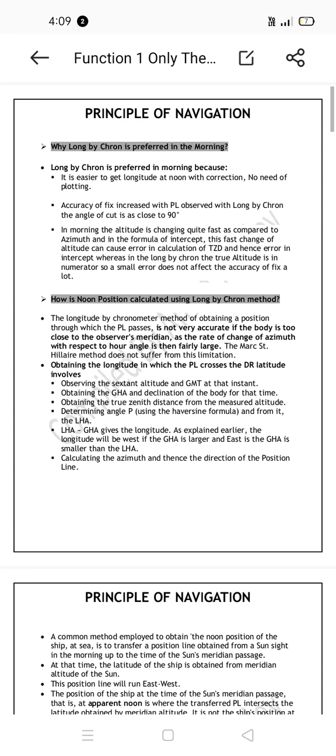In the morning the altitude is changing quite fast as compared to the azimuth, and in the formula of intercept this fast change of altitude can cause error in calculation of TZD and hence error in the intercept, whereas in long-by-chron the true altitude is in the numerator, so small error does not affect the accuracy of the fix.

Now we have to look at how we calculate it. From the formula we get the long-by-chron P, determining P, and then after determining P we get the azimuth, then from it we get the position line, and from that the DR longitude.

Now a common method to obtain the noon position of a ship at sea is to transfer the position line obtained from a sun sight in the morning up to the time of the sun's meridian passage. At that time the latitude of the ship is obtained from the meridian altitude of the sun.

This position line will run east-west, because our latitude is only our PL.

Now the position of the ship at the time of Sun's meridian passage, that is apparent noon, is where the transferred PL intersects. The latitude obtained by meridian altitude is not the ship's position at 1200 hours by the ship's clock.

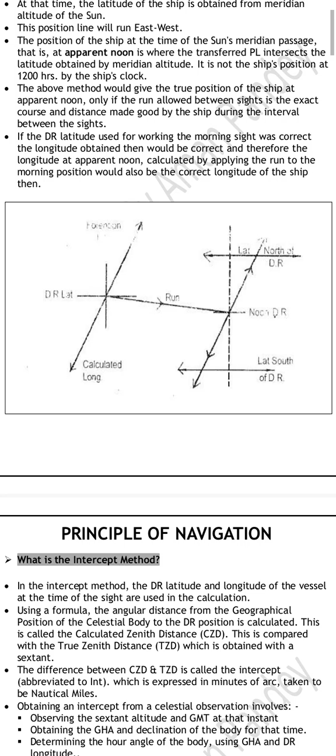The above method would give the true position of a ship at apparent noon only if the run allowed between the sights is the exact distance made good by the ship during the interval between the sights. If the DR latitude used for working the morning sight was correct, the longitude obtained then would be correct, and therefore the longitude at apparent noon calculated by applying this run to the morning position would also be the correct longitude of the ship then.

What is the intercept method? This is where we take a difference between CZD and TZD, and that becomes the intercept, and from that we get a PL.

In the intercept method, the DR latitude and longitude of the vessel at the time of sight are used in the calculation. Using the formula, the angular distance from the geographical position of the celestial body to the DR position is calculated. This is called the calculated zenith distance, and it is compared with the true zenith distance, which is obtained with the sextant. The difference between CZD and TZD is called the intercept, which is expressed in minutes of arc.

Obtaining the intercept from the celestial observation involves observing the sextant altitude and GMT at that instant, obtaining the GHA and declination of that body for that time, determining the angle of the body using GHA and DR longitude, calculating CZD using the formula, obtaining the TZD from the sextant altitude, comparing the TZD and CZD to obtain the intercept, which will be named away if TZD is greater and toward if TZD is lesser, then obtaining the azimuth and from it the direction of the PL.

Now what is the difference between long-by-chron and the intercept method? One of the key differences between the two sights is that in the PL of the former, one point on the PL is known, whereas in the case of the latter the point on the PL is not known. Long-by-chron involves a known initial position, while intercept sights involve finding the position through a process of adjustment and intersection of lines of position.

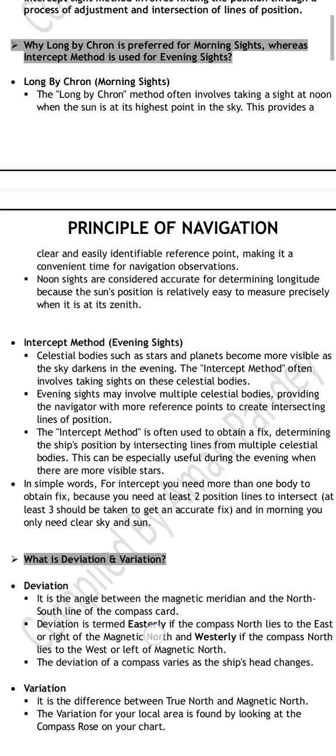Why is long-by-chron preferred for morning sight, whereas intercept method is used for evening sight? Long-by-chron morning sight often involves taking a sight at noon when the sun is at its highest point in the sky. This involves a clear and easily identifiable reference point, making it a convenient time for navigation observation.

Noon sights are considered accurate for determining longitude because the sun's position is relatively easy to measure precisely when it is at its zenith.

In the intercept method, celestial bodies such as stars and planets become more visible as the sky darkens in the evening. The intercept method often involves taking sights on these celestial bodies. Evening sight may involve multiple celestial bodies, providing the navigator with more reference points to create intersecting lines of position.

The intercept method is often used to obtain a fix, determining the ship's position by intersecting lines from multiple celestial bodies. This can be especially useful during the evening when there are more visible stars. In other words, for intercept you need more than one body to obtain a fix, because you need at least two position lines to intersect.

At least three should be taken to get an accurate fix, and in the morning you only need the sky and sun. What is deviation and variation?

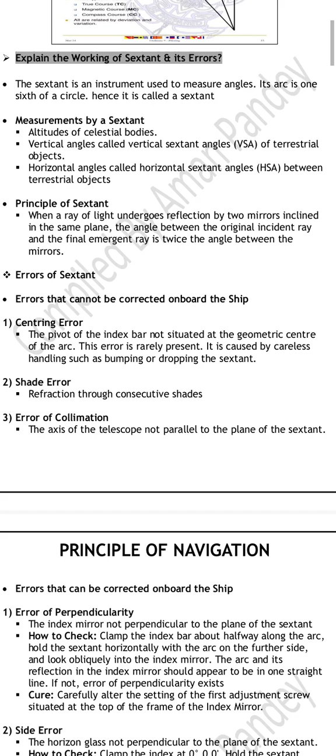Now what is the working of the sextant and its measurement for sextant altitude of the celestial body, VSA and HSA? Principle of sextant: when a ray of light undergoes reflection by two mirrors inclined in the same plane, the angle between the original incident ray and the final emergent ray is twice the angle between the mirrors.

Errors of sextant: centering error - the pivot of the index bar is not situated at the geometric center of the arc. This error is rarely present; it is caused by careless handling. Shade error is caused by refraction through consecutive shades. Error of collimation is when the axis of the telescope is not parallel to the plane of the sextant.

This is an error that can be corrected on board the ship. Error of perpendicularity: the index mirror is not perpendicular to the plane of the sextant. Now how to correct it? Just clamp the index bar about halfway along the arc.

Now hold the sextant horizontally with the arc on the further side and look obliquely into the index mirror. The arc and its reflection in the mirror should appear to be in one straight line. If not, error of perpendicularity exists. Cure: carefully alter the setting of the first adjustment screw situated at the top of the frame of the index mirror.

Now what is side error? The horizon glass not perpendicular to the plane of the sextant. Now how to check it? Just clamp it to 0 degrees, hold the sextant vertically and look at a heavenly body.

Turn the micrometer one way and then the other while looking at the body. The reflected image of the body will move above and below the direct image and should pass exactly over it. If the reflected image passes to the left or right of the direct image, side error exists. Cure: carefully alter the setting of the second adjustment screw situated at the top center of the frame of the horizon glass.

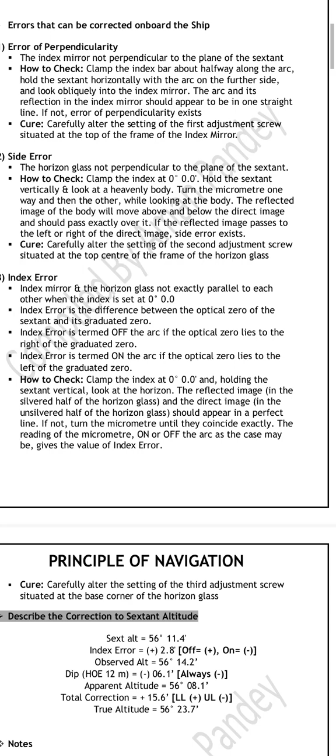Again, the horizon glass not perpendicular to the plane of the sextant. To check this, bring it to 0, hold the sextant vertically, look at the heavenly body, turn the micrometer one way and then the other while looking at the body. The reflected image of the body will move above and below the direct image and should pass exactly over it. If the reflected image passes to the left or right of the direct image, side error exists. Carefully alter the setting of the second adjustment screw situated at the top center of the frame of the horizon glass.

Now, index error: the index glass and the horizon glass are not exactly parallel to each other when the index is set to 0. Index error is the difference between the optical zero of the sextant and its graduated zero. Index error is termed off the arc if the optical zero lies to the right of the graduated zero. Index error is termed on the arc if the optical zero lies to the left of the graduated zero.

Left of the graduated zero. How to check? Clamp the index at 0 degree and hold the sextant vertical at the horizon.

The reflected image in the silvered half of the horizon glass and the direct image in the unsilvered part of the horizon glass should appear in a perfect line. If not, turn the micrometer until they coincide exactly. The reading of the micrometer, on or off the arc, as the case may be, gives an index error.

Carefully alter the setting of the third adjustment, situated at the base corner of the horizon glass.

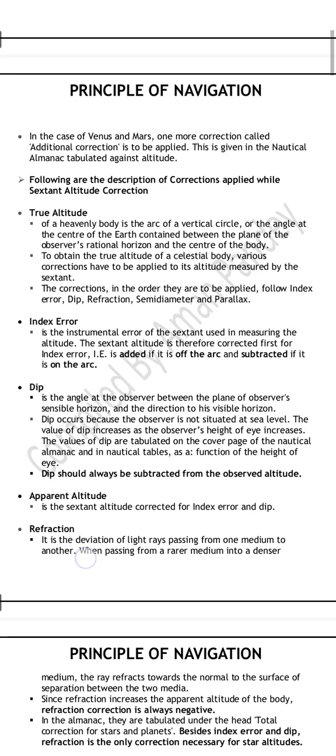True altitude of a heavenly body is the arc of the vertical circle, or the angle at the center of the earth contained between the plane of the observer's rational horizon and the center of the body.

To obtain the true altitude of the body, various corrections have to be applied to the altitude measured by the sextant. The corrections, in order, are index, dip, refraction, and parallax.

The true altitude of a heavenly body is the arc of a vertical circle, or the angle at the center of the earth contained between the plane of the observer's rational horizon and the center of the body.

Corrections have to be applied to the altitude measured by the sextant, in the order: index error, dip, refraction, and semi-diameter. Index error is the instrument error of the sextant used in measuring the altitude. The sextant altitude is therefore first corrected for index error, which is added if it is off the arc and subtracted if it is on the arc.

Dip is the angle at the observer between the plane of the observer's sensible horizon and the direction of the visible horizon. Dip occurs because the observer is not situated at sea level. The value of dip increases as the observer's height increases.

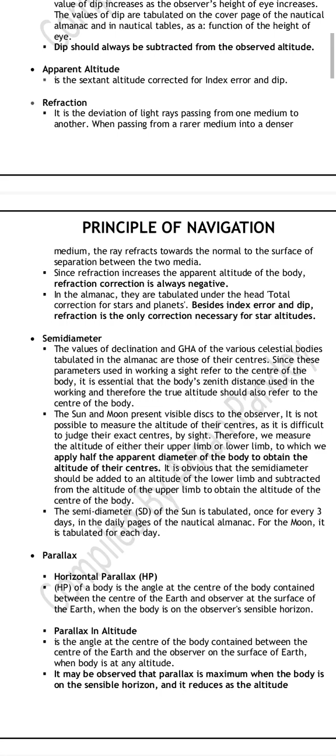Refraction is the deviation of light rays passing from one medium to another. When passing from a rarer medium into a denser one, the ray deflects towards the normal to the surface of separation between the two media. Since refraction increases the apparent altitude of the body, the refraction correction is always negative.

In the almanac, this is tabulated under the heading total correction for stars and planets. Besides index error and dip, refraction is the only correction necessary for star altitudes.

Refraction correction is always negative. When passing from a rarer medium into a denser medium, the ray deflects towards the normal to the surface of separation between the two media. Since refraction increases the apparent altitude of the body, the refraction correction is always negative, as tabulated in the almanac besides the index error.

Semi-diameter: the values of declination and GHA of various celestial bodies tabulated in the almanac refer to their center. Since these are used in working a sight, the body's zenith distance used in the working, and therefore the true altitude, should also refer to the center of the body.

The sun and moon present a visible disk to the observer. It is not possible to measure the altitude of their center, as it is difficult to judge their exact center by sight. Therefore, we measure the altitude of either their upper limb or lower limb, and apply half the apparent diameter of the body to obtain the altitude of the center.

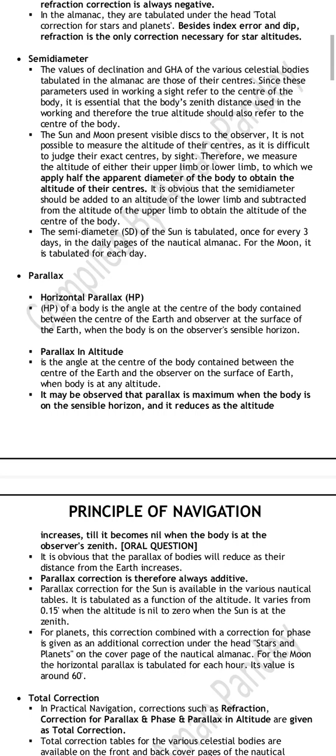It is obvious that the semi-diameter should be added to an altitude of the lower limb and subtracted for the altitude of upper limb center of the body. The semi-diameter of the sun is tabulated once for every 3 days in the daily pages of the nautical almanac. For the moon, it is tabulated for each day.

Horizontal parallax of the body is the angle at the center of the body contained between the center of the earth and the observer at the surface of the earth, when the body is on the observer's sensible horizon. Parallax in altitude is the angle at the center of the body contained between the center of the earth and the observer on the surface of the earth when the body is at any altitude.

It may be observed that parallax is maximum when the body is on the sensible horizon, and it reduces as the altitude increases till it becomes nil when the body is at the observer's zenith. The parallax of a body will reduce as the distance from earth increases. Parallax correction is therefore always additive.

Parallax correction for the sun is given in the various nautical tables, tabulated as a function of the altitude. It varies from 0.15 minute when the altitude is nil to 0 when the sun is at the zenith. For planets, the correction combined with the correction for phase is given as an additional correction under the heading stars and planets on the cover page of the nautical almanac.

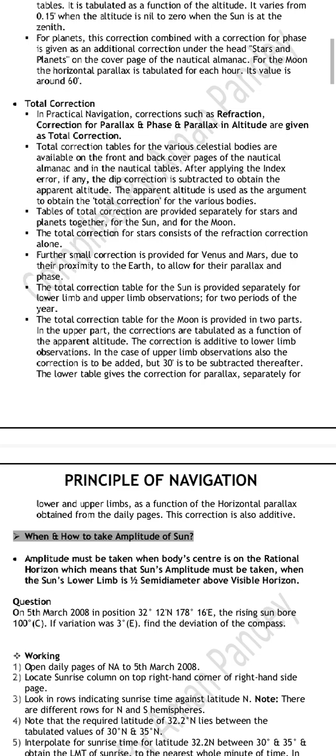A further small correction is provided for Venus and Mars due to their proximity to the Earth, to allow for their parallax and phase. The total correction table for the Sun is provided separately for lower limb and upper limb observation for 2 periods of the year. The total correction table for the Moon is provided in 2 parts.

In the upper part, the corrections are tabulated as a function of the apparent altitude. The correction is additive for lower limb observation. In the case of upper limb observation, the correction is also added, but 30 minutes is to be subtracted thereafter. The lower table gives the correction for parallax, separately for lower limb and upper limb, as a function of the horizontal parallax obtained from the daily pages. This correction is also additive.

We just took the bearing from the compass, 100 degrees. Now from the deviation card we will get the deviation as well. Now looking at this, we will be getting our GMT time.

Look at the rows indicating sunrise against latitude. There are different rows for north and south hemisphere. Note the required latitude between the tabulated values and interpolate for sunrise, to the nearest whole minute of time. In this case, this is the LMT time. Tabulate the values as shown and calculate the GMT of sunrise.

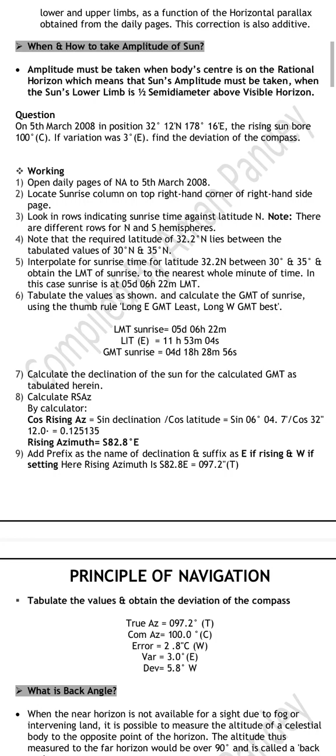We get the GMT. After getting the GMT, we'll be getting declination and latitude. We know, right? Calculating the declination for the calculated GMT and directly verify sin declination by cos latitude. We get the cos amplitude, and then azimuth we just take as southeast.

If it is morning, it is east, and if it is after 12 o'clock, setting, it is west. And using the declination sign, we use the name of the declination and we get the tabulated value from the deviation card. Now this is just an example.

True azimuth is 97.2, we are getting. Compass azimuth is 100. So if we see, error is 2.8 degrees, variation is 3 degrees and deviation is 5.8.

So we come to know, true to compass, then it is okay. So here we get is 2.8.

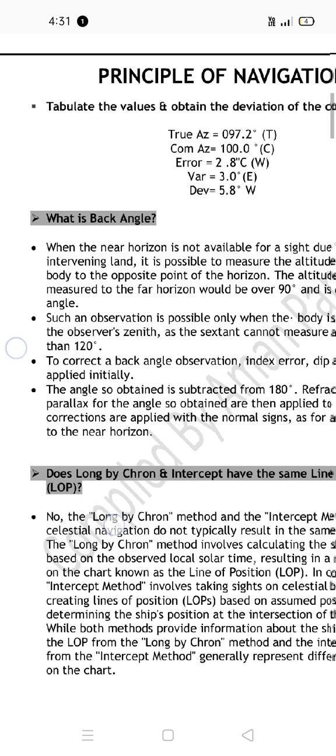Now what is back angle? When the near horizon is not available for sight due to fog or intervening land, it is impossible to measure. It is possible to measure the altitude of the celestial body to the opposite point of the horizon. The altitude thus measured to the far horizon will be over 90 degrees and it is called back angle. Such an observation is possible only when the body is fairly close to the observer's zenith, as the sextant cannot measure an angle greater than 120. To correct a back angle observation, index error, dip and SD are applied initially. The angle so applied is subtracted from 180 degrees and refraction, parallax is also obtained then applied to it. All corrections are applied with normal sign as for an observation to the near horizon.

What is back angle? If the horizon is not available for sight due to fog or intervening obstruction, it is possible to measure the altitude of a celestial body to the far horizon. The altitude thus measured to the far horizon will be over 90 and is called a back angle. Such an observation is possible only when the body is fairly close to the observer's zenith.

Now, does the Long by Chron and intercept have the same line of position? No. The Long by Chron method and intercept method in celestial navigation do not typically result in the same position line. The Long by Chron method involves calculating the ship's longitude based on observed local solar time, resulting in a meridian line on the chart known as the LOP. In contrast, the intercept method involves taking a sight on a celestial body, creating an LOP based on the assumed position and determining the ship's position at the intersection of these lines. While both methods provide information about the ship's location, the LOP from the Long by Chron method and the intersecting LOPs from the intercept method generally represent different positions on the chart.

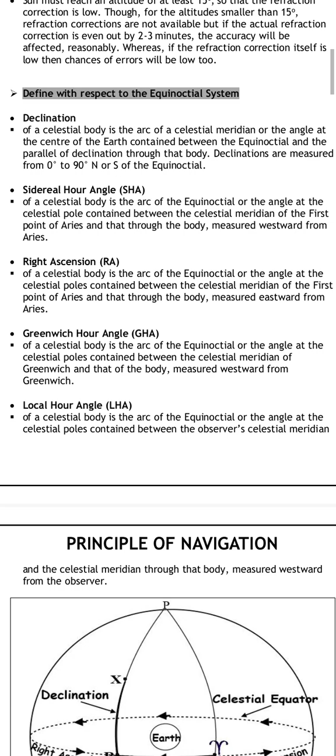Declination of a celestial body is the arc of the celestial meridian, or the angle at the center of the earth, contained between the equinoctial and the parallel of declination through the body. Declinations are measured from 0 to 90 degrees, north or south of the equinoctial.

Sidereal hour angle is the arc of the equinoctial, or the angle at the celestial pole, contained between the celestial meridian of the first point of Aries and through the body, measured westward from Aries.

Right ascension is the arc of the equinoctial, or angle at the celestial pole, contained between the celestial meridian of the first point of Aries and the body, measured eastward from Aries.

Greenwich hour angle of the body is the arc of the equinoctial, or the angle at the celestial pole, contained between the celestial meridian of Greenwich and that of the body, measured westward from Greenwich.

LHA of a body is the arc of the equinoctial, or the angle at the celestial pole, contained between the observer's celestial meridian and the celestial meridian of the body, measured westward from the observer's meridian.

The observer's rational horizon is a great circle on the celestial sphere where every point on it is 90 degrees away from its zenith.

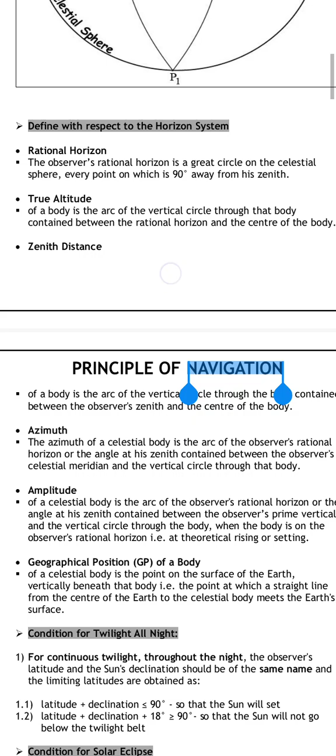True altitude of a body is the arc of the vertical circle through that body, contained between the rational horizon and the center of the body.

Zenith distance of a body is the arc of the vertical circle through the body, contained between the observer's zenith and the center of the body.

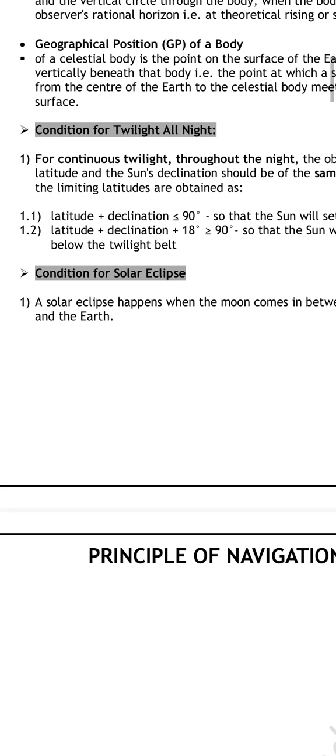This ensures the sun will not go below that twilight belt, so we require the same name for the sun's declination. For continuous twilight throughout the night, the observer's latitude and the sun's declination should be of the same name.

Observer's latitude and sun's declination should be of the same name. This is a condition for a solar eclipse, which happens when the moon comes in between the sun and the earth.

What is the pivot point? The pivot is an imaginary point of the vessel about which the vessel's turns take place. Its location changes with respect to the motion of the vessel.

The pivot point is significant because it allows the ship's operator to predict how the vessel will behave during a turn. It is used in navigational planning to determine the space needed for a vessel to execute a turn safely. Since the pivot point changes with the movement of the vessel, it can be explained with the following situation.

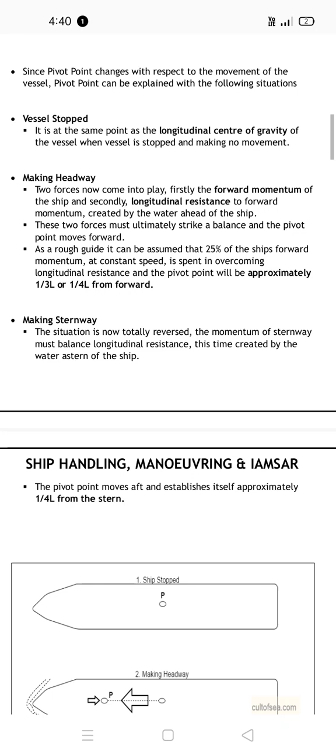When the vessel is stopped, the pivot point is at the same location as the longitudinal center of gravity. When the vessel is stopped and begins making headway, forward momentum and the longitudinal resistance created by the water ahead strike a balance, and the pivot point moves forward. As a rough guide, assuming 25% of the ship's forward momentum at a constant speed is spent overcoming longitudinal resistance, the pivot point will be approximately one-third, or one-fourth, of the length from the forward end. When making sternway, it is about one-fourth from the stern.

Now, what is the turning circle of a ship, and what is its significance? A ship's turning circle is the path followed by the ship's pivot point when making a 360-degree turn.

The knowledge of the turning circle is vital to a navigator, as this measure gives an idea of whether there is sufficient sea room in case action needs to be taken during an emergency.

What is advance? Advance is the distance traveled by the center of gravity along the original course line in the forward direction, until there is a 90-degree change from the original course.

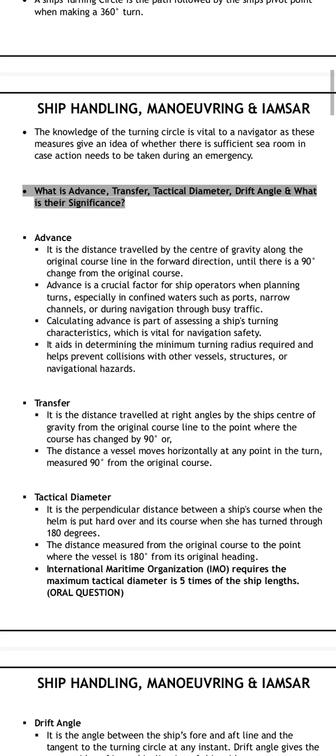Advance is a crucial factor for a ship's operator when planning turns, especially in confined waters such as ports, narrow channels, or during navigation through busy traffic. Calculating advance is part of assessing the ship's turning characteristics, which is vital for navigation safety. It aids in determining the minimum turning radius required and helps prevent collision with other vessels, structures, or navigational hazards.

Now, what is transfer? Transfer is the distance traveled at right angles by the ship's center of gravity from the original course line to the point where the course has changed by 90 degrees, or the distance a vessel moves horizontally at a point in the turn, measured 90 degrees from the original course.

What is tactical diameter? It is the perpendicular distance between a ship's course when the helm is put hard over and its course when the ship has turned through 180 degrees. The distance is measured from the original course to the point where the vessel is 180 degrees from its original heading.

IMO requires that the maximum tactical diameter is 5 times the ship's length. Tactical diameter is the perpendicular distance between the ship's course when the helm is put hard over and its course when she has turned through 180 degrees, measured from the original course to the point where the vessel is 180 degrees from its original heading.

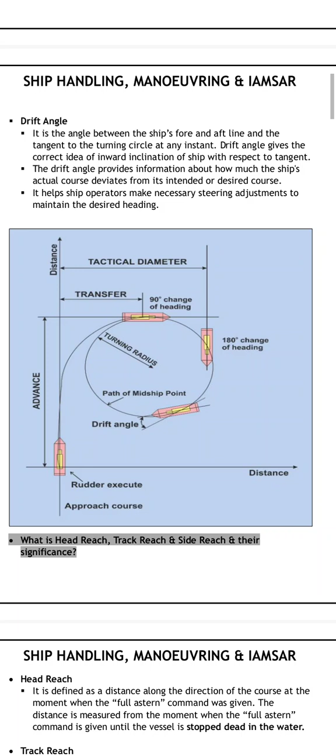Drift angle is the angle between the ship's fore and aft line and the tangent to the turning circle at any instant. Drift angle gives the correct idea of inward inclination of the ship with respect to the tangent. The drift angle provides information about how much the ship's actual course deviates from its intended or desired course.

Drift angle is the angle between the ship's fore and aft line and the tangent to the turning circle at any instant. It gives the correct idea of inward inclination of the ship with respect to the tangent, and provides information about how much the ship's actual course deviates from its intended or desired course. It helps the ship's operator make necessary steering adjustments to maintain the desired heading.

Head reach is defined as the distance along the direction of the course at the moment when the full astern command was given. The distance is measured from the moment when the full astern command is given until the vessel is stopped dead in the water.

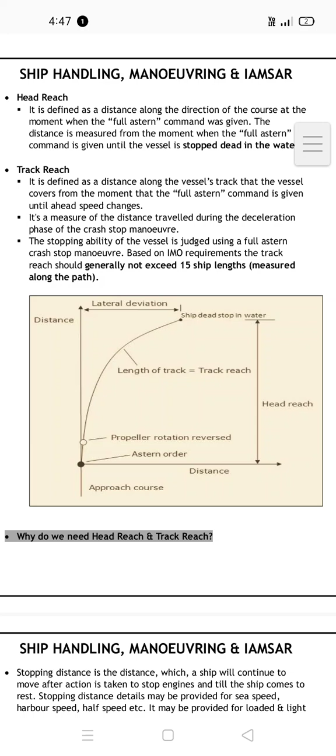Track reach is 15 times the ship's length. The stopping ability of the vessel is judged using a full astern crash stop maneuver based on IMO requirements. The track reach should generally not exceed 15 times the ship's length.

Why do we need head reach and track reach? Stopping distance is the distance which a ship will continue to move after action is taken to stop engines until the ship comes to rest. Stopping distance details may be provided for sea speed, harbor speed, half speed, etc., and may be provided for loaded and light conditions.

Stopping distance is the distance which a ship will continue to move after action is taken to stop engines until the ship comes to rest. Details may be provided for sea speed, harbor speed, half speed, etc., and for loaded and light conditions. Stopping ability is measured by the track reach and head reach realized in a stop engine full astern maneuver, performed after a steady approach at the test speed until the head speed in ship's coordinates changes sign.

Why do we need head reach and track reach? Stopping distance is the distance which a ship will continue to move after action is taken to stop engines until the ship comes to rest. Stopping distance details may be provided for sea speed, harbor speed, and half speed, and may be provided for loaded and light conditions.

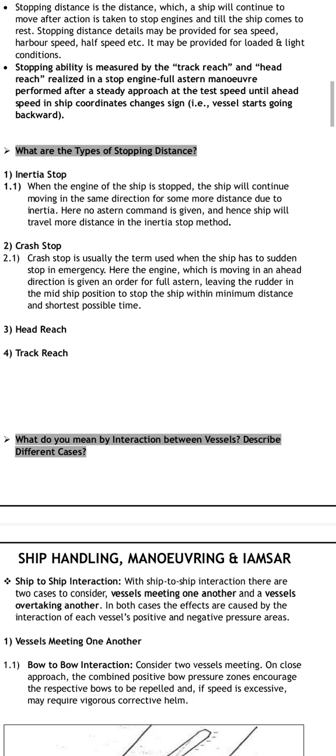Now the ship will continue to move if astern command is given, and once no astern command is given, the ship is stopped. When the engine of the ship is stopped, it will continue to move in the same direction for some more distance due to inertia. No astern command is given, hence the ship travels more distance - this is inertia stop. Head reach, track reach.

Consider two vessels on a close approach. Now, combination of positive bow pressure zones encourages them to be repelled, and excessively so.

Now two ships abeam: in this case, the combined low pressure zones encourage suction. If the vessels are very close, this can cause a violent broadside collision.

Broadside collision: the bow of each vessel now comes under the influence of the other vessel's stern, which also means the rudder of each vessel is being affected by the positive pressure of the other vessel's bow. This causes each vessel to take a sheer towards the other vessel, and if in a narrow channel or fairway, for the stern to be cast towards the boundaries of the channel or fairway.

Now stern to stern: as each vessel draws clear, the combined low pressure causes the sterns to be drawn towards each other and assists the vessels to regain their original track.

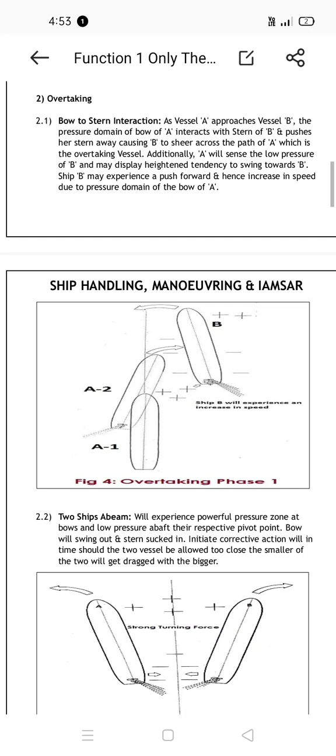Now, two ships abeam will experience a powerful pressure zone at the bow and low pressure abaft. Relative to the pivot point, the bow will swing out and the stern will be sucked in. Corrective action should be initiated in time should the two vessels be allowed to close, as the smaller of the two will get dragged with the bigger.

Now stern to bow interaction: the overtaking vessel, as it passes ahead of the overtaken vessel, may sense the effect of its bow being sucked towards vessel A - this is the bank effect.

What are the factors affecting the turning circle of the ship? Structural design and the length of the vessel - generally speaking, the longer the ship, the greater the turning circle. The smaller the clearance between the rudder and the hull, the more effective will be its turning action.

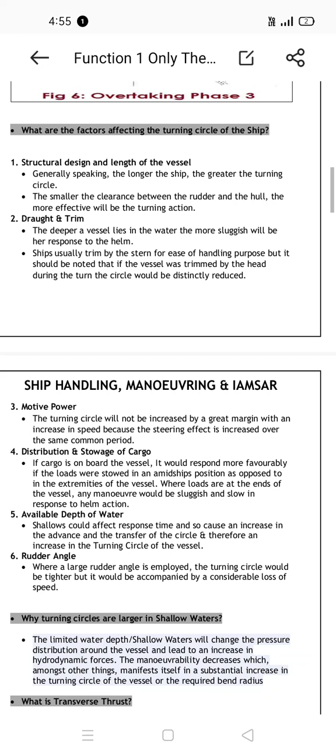Draft and trim: the deeper a vessel lies in the water, the more sluggish will be her response to the helm. Ships usually trim by stern for ease of handling purposes, but it should be noted that if the vessel was trimmed by the head during the turn, the circle would be distinctly reduced.

Now, what is motive power? The turning circle will not be increased by a great margin with an increase in speed, because the steering effect - the steering period - is increased over the same common period. Now, what is the distribution and storage?

Because of the distribution and storage of cargo on board the vessel, it will respond more favorably if the loads are in an amidship position as opposed to the extremities of the vessel. Where loads are at the ends of the vessel, any maneuver will be sluggish and slow in response to helm action.

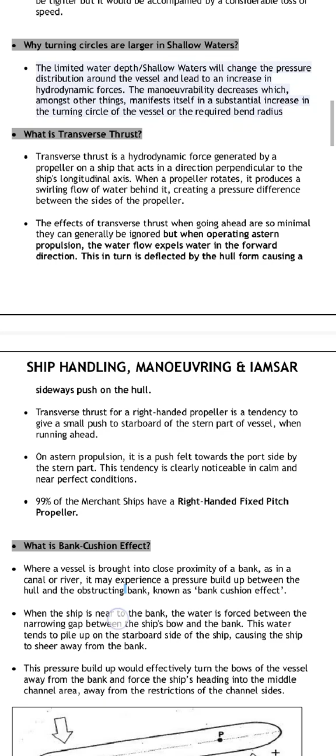What is transverse thrust? Transverse thrust is a hydrodynamic force generated by a propeller on a ship that acts in a direction perpendicular to the ship's longitudinal axis.

The limited water depth in shallow water will change the pressure distribution around the vessel and lead to an increase in hydrodynamic forces. The maneuverability decreases, which among other things manifests itself in a substantial increase in the turning circle of the vessel or the required bend radius.

Available depth and the rudder angle: where a large rudder angle is employed, the turning circle will be tighter, but it will be accompanied by considerable loss of speed.

The limited water depth in shallow water will change the pressure distribution around the vessel and lead to an increase in hydrodynamic forces. The maneuverability decreases, which among other things manifests itself in a substantial increase in the turning circle of the vessel, or the required bend radius.

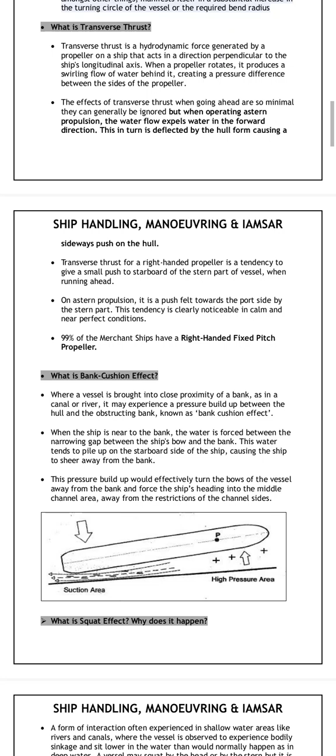When a propeller rotates, it produces a swirling flow of water behind it, creating a pressure difference between the sides of the propeller. The effects of transverse thrust when going ahead are so minimal they can generally be ignored, but when operating astern propulsion, the water flow expels water in the forward direction. This is then deflected by the hull form, causing a sideways push on the hull.

Transverse thrust for a right-handed propeller is the tendency to give a small push to starboard on the stern part of the vessel when running ahead. On astern propulsion, it is the opposite of that.

Now, what is the bank cushion effect? Where a vessel is brought into close proximity of a bank, as in a canal or river, it may experience a pressure build up between the hull and the obstructing bank, known as the bank cushion effect. When the ship is near the bank, water is forced into the narrowing gap between the ship's bow and the bank. The water tends to pile up on the starboard side of the ship, causing the ship to sheer away from the bank. This pressure buildup will effectively turn the bow of the vessel away from the bank and force the ship's heading into the middle channel area, away from the restriction of the channel sides.

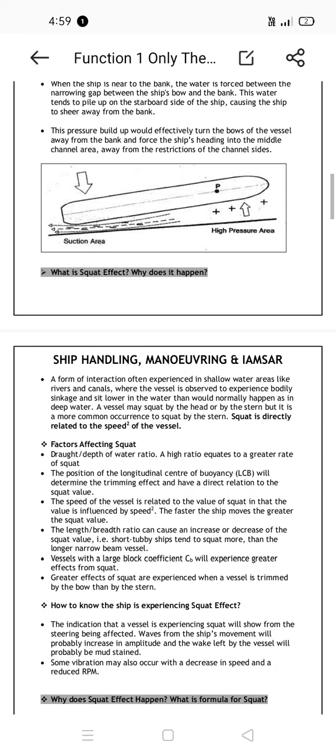A form of interaction often experienced in shallow water areas like rivers and canals is where the vessel is observed to experience a bodily sinkage and sit lower in the water than would normally happen. As in deep water, a vessel may squat by the head or by the stern, but it is more often a common occurrence to squat by the stern.

Squat is directly related to the speed squared of the vessel. Factors affecting squat include the draft to depth of water ratio; a higher ratio equates to a greater rate of squat. The position of the longitudinal center of buoyancy will determine the trimming effect and have a direct relation to the squat value. The speed of the vessel is related to the value of squat, in that the value is influenced by speed squared. The faster the ship moves, the greater the squat value.

The length to breadth ratio can cause an increase or decrease of the squat value. That is, short tubby ships tend to squat more than longer, narrow beam vessels; a vessel with a large block coefficient will experience a greater effect from squat.

A greater effect of squat is experienced when a vessel is trimmed by the bow than by the stern.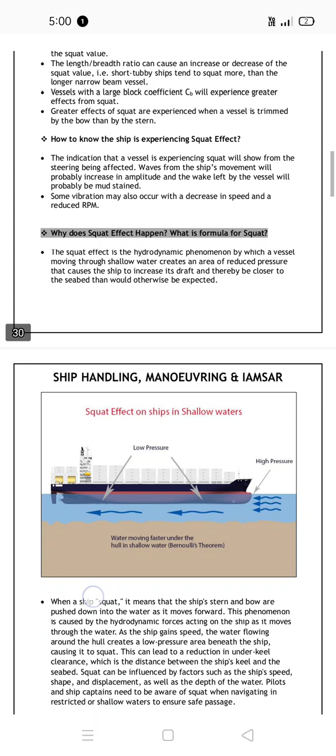How do you know a ship is experiencing a squat effect? The indication will show from the steering being affected. Waves from the ship's movement will probably increase in amplitude and the wake left by the vessel will probably be mud stained. Some vibration may also occur with a decrease in speed and reduced RPM.

Why does the squat effect happen? The squat effect is the hydrodynamic phenomenon by which a vessel moving through shallow water creates an area of reduced pressure that causes the ship to increase its draft, making it closer to the seabed than would otherwise be expected. When a ship squats, it means the stern and bow are pushed down into the water as it moves forward. This is caused by hydrodynamic forces acting on the ship as it moves through the water. As the ship gains speed, the water flow around the hull creates a low pressure area beneath the ship, causing it to squat. This can lead to a reduction in UKC, the distance between the ship's keel and the seabed. Squat can be influenced by factors such as the ship's speed, shape and displacement, as well as the depth of the water. Pilots and ship's captains need to be aware of squat when navigating in restricted or shallow waters to ensure safe passage.

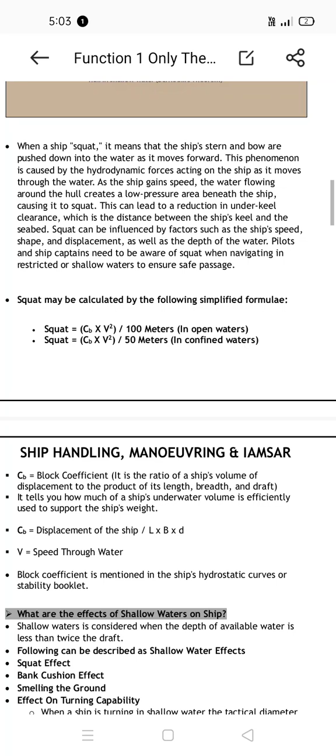When a ship squats, it means the ship's stern and bow are pushed down into the water as it moves forward. This phenomenon is caused by the hydrodynamic forces acting on the ship as it moves through the water. As the ship gains speed, the water flow around the hull creates a low pressure area beneath the ship, causing it to squat. This can lead to a reduction in UKC, the distance between the ship's keel and the seabed. Squat can be influenced by factors such as the ship's speed, shape and displacement, as well as the depth of the water. Pilots and ship's captains need to be aware of squat when navigating in restricted or shallow water to ensure safe passage.

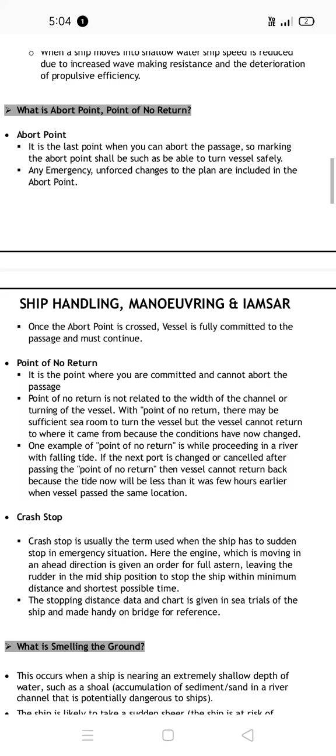What is an abort point? It is the last point when you can abort the passage. Marking the abort point shall be such that you are able to turn the vessel safely. Any emergency or unforced changes to the plan are included in the abort point. Once the abort point is crossed, the vessel is fully committed to the passage and must continue.

The point of no return is the point where you are committed and cannot abort the passage. It is not related to the width of the channel or the turning of the vessel. At the point of no return, there may be sufficient sea room for the vessel, but the vessel cannot return to where it came from because the conditions have now changed.

One example of point of no return is while proceeding in a river with a falling tide. If the next point is changed or cancelled after passing the point of no return, the vessel cannot return back, because the tide will now be less than it was a few hours earlier when the vessel passed the same location.

Crash stop is usually the term used when the ship has to make a sudden stop in an emergency situation. Here the engine, which is moving ahead, is given an order to full astern, leaving the rudder in the midship position, in order to stop the ship within the minimum speed, distance and shortest possible time.

The stopping distance data and chart is given in the sea trials for the ship. What is smelling the ground? This occurs when a ship is nearing an extremely shallow depth of water, such as a shoal.

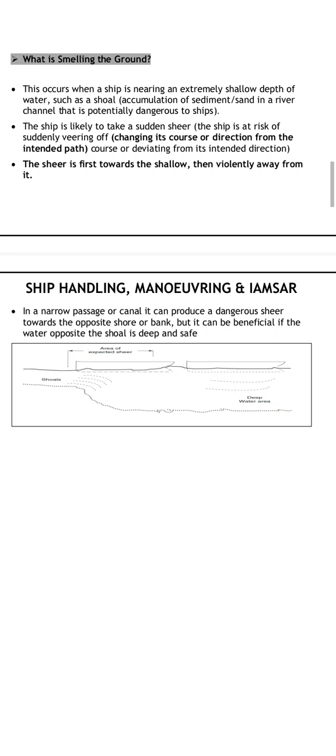The ship is likely to take a sudden shear, causing it to veer off or deviate from its intended course. The shear is first toward the shallow, then violently away from it. In a narrow channel or canal, this can produce a dangerous shear towards the opposite shore or bank, but it can be beneficial if the water opposite the shoal is deep and safe.

Now, procedure for the Williamson turn: Rudder hard over. Hard over until deviation from original course by 60 degrees. Rudder hard over to the opposite side when heading 20 degrees short of the opposite course. Rudder to midship and the ship will be turned.

Now what is the Williamson turn? You put the wheel hard over to the side, 20 degrees short of the opposite course.

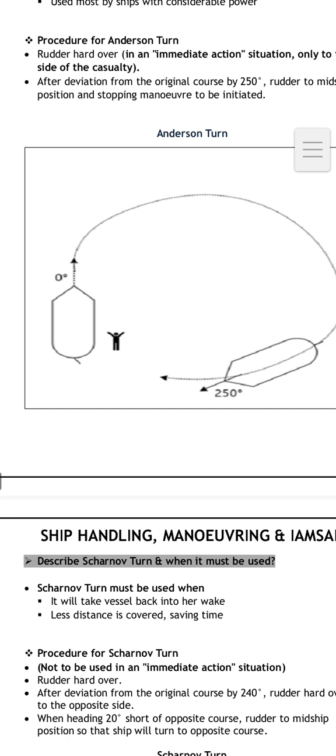Now describe the Scharnov turn. The vessel is brought back into its own wake. Less distance is covered, saving time.

Procedure for the Scharnov turn, not to be used in an immediate action situation: Rudder hard over after deviation from the original course by 240 degrees. Rudder hard over to the opposite side when heading 20 degrees short of the opposite, then rudder to midship so that the vessel will turn to the opposite course.

Now, the Loren turn must be used in heavy weather to facilitate launch and recovery of rescue boats and facilitate rescue work by other craft. Circling calms the sea by disturbing wave patterns. An additional ship circling to windward will calm the seas further.

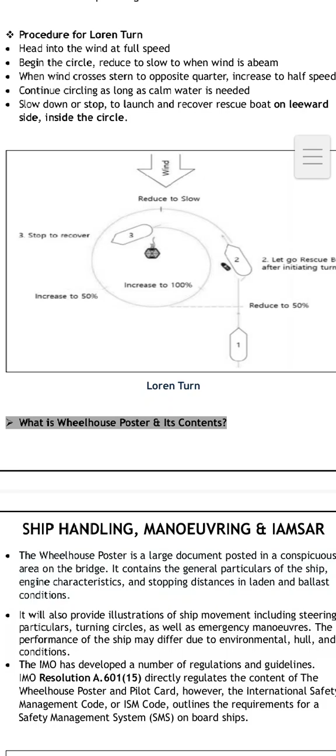Procedure for the Loren turn: Head into the wind at full speed, beginning the circle, reduce to slow speed when wind is abeam. When wind crosses stern to the opposite quarter, increase to half speed, continue circling as long as calm water is needed. Now slow down or stop and launch/recover the rescue boat on the leeward side inside the circle.

Now what is a wheelhouse poster? It is a large document posted in a conspicuous area on the bridge. It contains the general particulars of the ship, engine characteristics and stopping distance, in both laden and ballast conditions. It also provides illustrations of the ship's movement, including steering particulars, turning circle, as well as emergency maneuvers. The performance of the ship may differ due to environmental, hull and loading conditions.

The IMO has developed a number of regulations and guidelines that directly regulate the wheelhouse poster and pilot card. However, the International Safety Management Code outlines the requirement for a safety management system onboard ship.

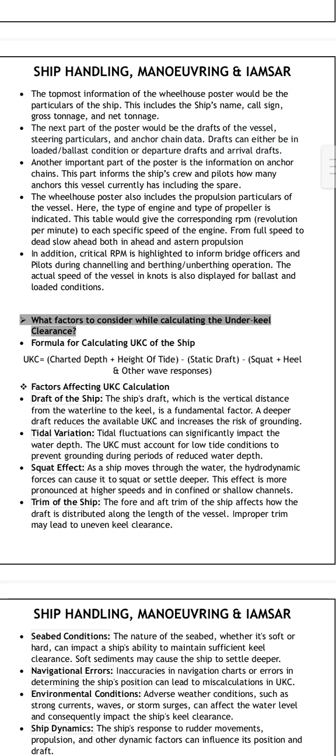The topmost information on the wheelhouse poster would be the particulars of the ship. This includes the ship's name, call sign, gross tonnage and net tonnage.

The next part of the poster covers the draft of the vessel, steering particulars and anchor chain data. Drafts can be in loaded or ballast condition, as well as departure and arrival drafts. Another important part of the poster is the information on anchor chains, informing the ship's crew and pilots how many anchors the vessel currently has, including the spare.

Again, an important part of the poster is the information on anchor chains, telling the ship's crew and pilots how many anchors this vessel currently has, including the spare.

The wheelhouse poster also includes the propulsion particulars of the vessel. The type of engine and type of propeller is indicated, along with the corresponding RPM to each specific speed of the engine, from full speed to its slowest speed, both in ahead and astern propulsion.

In addition, critical RPM is highlighted to inform bridge officers and pilots during channeling and berthing/unberthing operations. The actual speed of the vessel in knots is also displayed for ballast and loaded conditions.

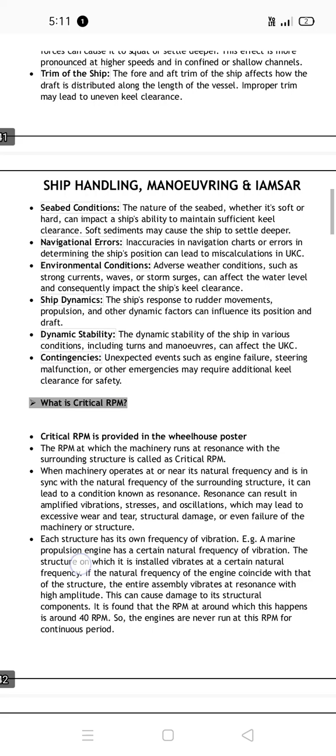Environmental conditions like adverse weather, such as strong currents, waves, or storm surges, can affect the water level and consequently impact the ship's keel clearance.

Ship's dynamics: the ship's response to rudder movement, propulsion, and other dynamic factors can influence its position and draft. The dynamic stability of the ship in various conditions, including turns and maneuvers, can affect the UKC.

Contingency: unexpected events such as engine failure, steering malfunction, or other emergencies may require additional keel clearance for safety.

What is a critical RPM? Critical RPM is provided in the wheelhouse poster. It is called critical RPM when machinery operates at or near its natural frequency and is in sync with the natural frequency of the surrounding structure, running at resonance with the surrounding structure.

This can lead to a condition known as resonance. Resonance can result in amplified vibration, stresses, and oscillation, which may lead to excessive wear and tear, structural damage, or even failure of the machinery or structure.

Each structure has its own frequency of vibration. For example, a marine propulsion engine has a natural frequency of vibration, and the structure on which it is installed also vibrates at a certain natural frequency. If the natural frequency of the engine coincides with that of the structure, the entire assembly vibrates in resonance with high amplitude, which can cause damage to its structural components.

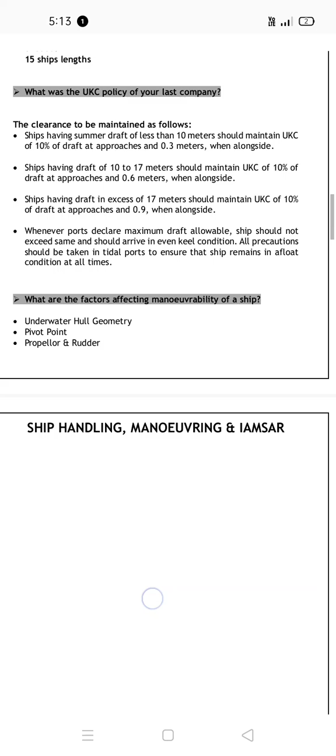What is the UKC policy of your last company? For ships with a summer draft of less than 10 meters, the UKC should be maintained at 10% of the draft, or approximately 0.3 meters, when alongside.

Ships with a draft of 10 to 17 meters should maintain a UKC of 10% of draft, or approximately 0.6 meters, when alongside. Ships with a draft over 17 meters should maintain 10%.

Whenever the maximum draft allowable is declared, the ship should not exceed it and should arrive in even keel condition. All precautions should be taken in tidal ports to ensure it remains safe.

What are the factors affecting maneuverability of the vessel? Underwater hull geometry, pivot point, propeller, and rudder.

Now we are going with the IAMSAR, the International Aeronautical and Maritime Search and Rescue manual. It is a manual for the organization and operation of maritime and aviation search and rescue. The IAMSAR handbook is jointly published by two UN agencies, ICAO and IMO. It contains guidelines for search and rescue in terms of shipping and aviation.

The purpose of IAMSAR is to ensure that cooperation between the two areas of operation is effective, and that it can be carried out in actual rescue operations between different rescue organizations and units. It is important to ensure smooth cooperation between the two areas because many ship and aircraft accidents involve both ships and aircraft in search and rescue operations.

The IAMSAR manual consists of three volumes: Organization and Management, Mission Coordination, and Mobile Facilities, carried on ships as Volume 3.

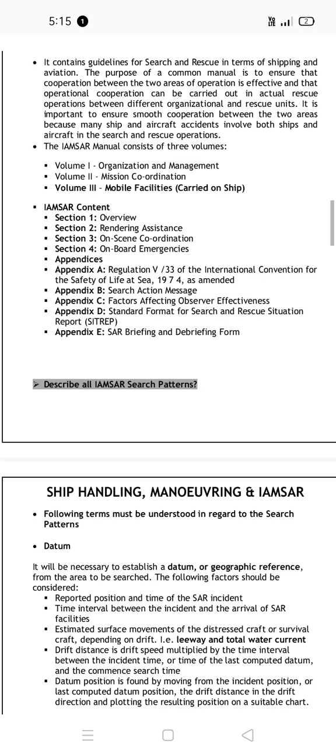IAMSAR content includes: overview, rendering assistance, on-scene coordination, onboard emergencies, regulations of the International Convention for Safety of Life at Sea, search action message, factors affecting observer effectiveness, standard format for search and rescue, SAR reporting format, and SAR briefing and debriefing form.

Now, the following terms may be understood in regard to this. What is meant by search patterns? Datum: it will be necessary to establish the datum, or geographic reference, for the area to be searched.

The following factors should be considered: reported position and time of the SAR incident, time interval between the incident and arrival of SAR facilities, and estimated surface movement of the distressed craft or survivor, depending on the leeway and total water current, with drift distance calculated by multiplying drift rate by time.

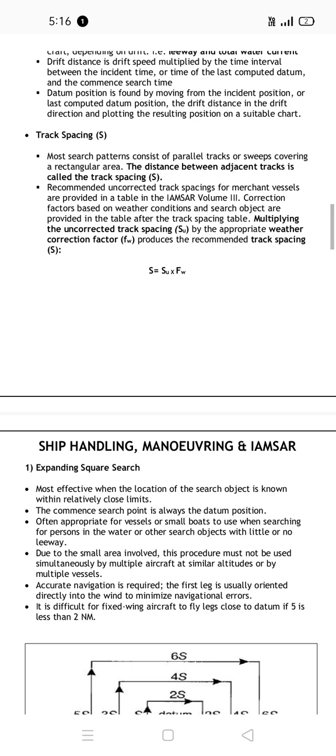The datum position is found by moving from the incident position to the last computed datum. Track spacing is the distance between two adjacent tracks. The formula involves multiplying the uncorrected track spacing by the weather correction factor.

Expanding square search.

This method is more effective when the location of the search object is known within a relatively close limit. The commence search point is always the datum position, often appropriate for vessels or small boats to use when searching for persons in the water or other objects with little or no leeway. Due to the small area involved, this procedure must not be used simultaneously by multiple aircraft at similar altitudes or by multiple vessels.

Accurate navigation is required. The first leg is usually oriented directly into the wind to minimize navigational errors. It is difficult for fixed wing aircraft to fly legs close to datum if the track spacing is less than 2 nautical miles.

Now, sector search. Most effective when the position of the search object is accurately known and the area is small. Used to search a circular area centered on a datum point. Due to the small area, this procedure must not be used by multiple aircraft at similar altitude. Aircraft may be used to perform independent searches.

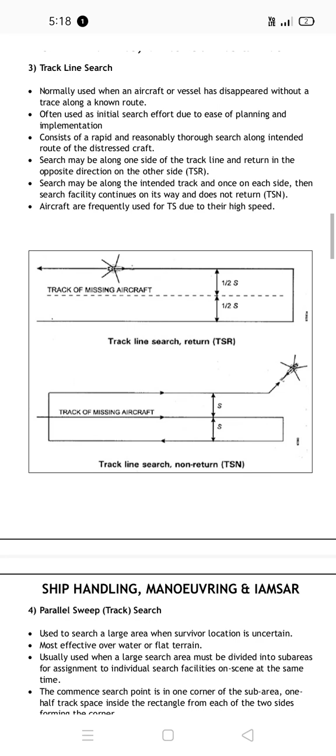Parallel sweep search is used for a large area where the survivor location is uncertain. Most effective over water or flat terrain, usually used when a large search area must be divided into sub-areas for assignment to individual search facilities on scene at the same time. The commence search point is one corner of the sub-area, one half track spacing inside the rectangle from each of the two sides forming the corner. Such legs are parallel to each other and to the long sides of the sub-area.

Now, what is a coordinated aircraft-vessel search pattern? It is normally used only if there is an on-scene coordinator, OSC, present to give direction to and provide communication with the participating aircraft.

Creeping line search, or coordinated search, is often used. The aircraft does most of the searching while the ship steams along a course at a speed directed by the on-scene coordinator, so that the aircraft can use it as a navigational checkpoint. As the aircraft passes over the ship, it can easily make corrections to stay on the track of its search pattern, giving a higher probability of detection than can normally be attained by an aircraft searching alone.

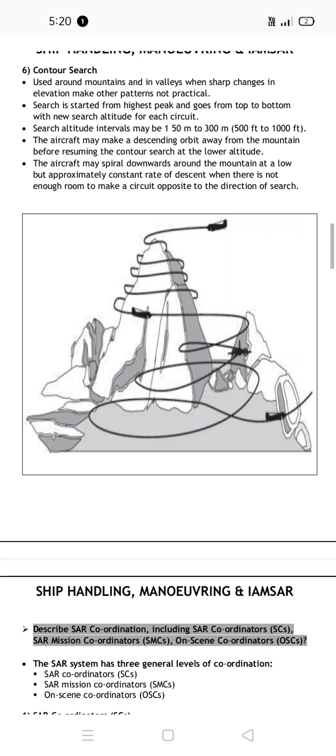Now, contour search. This is used around mountains and valleys, as in the highest point it goes from top to bottom, at an altitude of 150 to 300 meters. The aircraft may maintain a descending orbit.

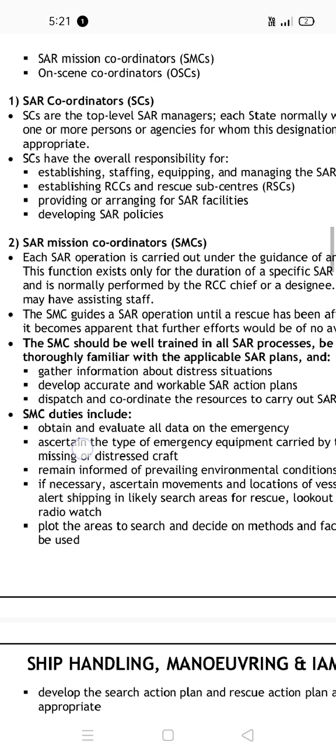SAR mission coordinators: each SAR operation is carried out under the guidance of an SMC. This function exists only for the duration of specific SAR incidents and is normally performed by the RCC chief or a designee. The SMC may have assisting staff. The SMC guides a SAR operation until a rescue has been effected or it becomes apparent that further effort will be of no avail.

The SMC should be well trained in all SAR processes, thoroughly familiar with the applicable SAR plans, and gather information about the distress situation, develop accurate and workable SAR action plans, and dispatch and coordinate resources to carry out SAR missions. SMC duties include obtaining and evaluating all data on the emergency, and ascertaining the type of emergency equipment carried by the missing craft.

SMC duties include obtaining and evaluating all data on the emergency, ascertaining the type of emergency equipment carried by the missing or distressed craft, remaining informed of prevailing environmental conditions, ascertaining movements and location of vessels, alerting shipping in likely search areas for lookout and radio watch.

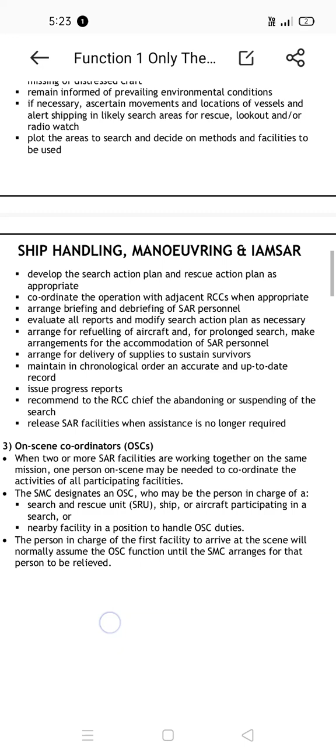Plot the area to search and decide on the method and facility to be used, and develop the search action plan and rescue plan as appropriate.

Coordinate the operation with adjacent RCCs when appropriate, arrange briefing and debriefing of SAR personnel, evaluate all reports and modify plans as necessary, arrange for refueling of aircraft for prolonged searches, make arrangements for accommodation of SAR personnel and for delivery of supplies to sustain survivors, maintain an accurate and up-to-date chronological record, issue progress reports, recommend to the RCC chief the abandoning or suspending of the search, and release SAR facilities when assistance is no longer required.

On-scene coordinator: when two or more SAR facilities are working together on the same mission, one on-scene coordinator may be needed to coordinate the activities of all participating facilities.

The SMC designates an OSC, who may be the person in charge of a search and rescue unit, ship, or aircraft participating in a search, or a nearby facility in a position to handle OSC duties. The person in charge of the facility to arrive at the scene will normally assume the OSC function until the SMC arranges for that person to be relieved.

Describe the vertical sextant angle in detail. It is the angle obtained by a vessel observing a lighthouse or an object ashore. The sextant is held vertically, the top of the lighthouse is brought to the foot of the object, and the angle is measured.

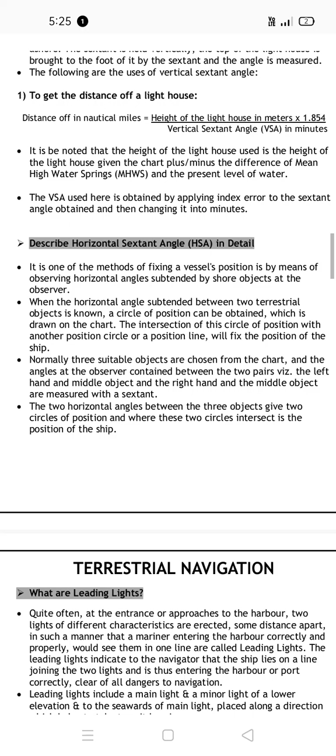It is to be noted that the height of the lighthouse used is the height given on the chart, plus or minus the difference between the mean high water springs and the present level of water. The VSA used here is obtained by applying index error to the sextant angle obtained and then converting it into minutes.

Describe the horizontal sextant angle in detail. It is one of the methods of fixing a vessel's position, by means of observing a horizontal angle obtained between two shore objects at the observer.

When the horizontal angle between two terrestrial objects is known, a position circle can be obtained and drawn on the chart. The intersection of this position circle with another position circle or a position line will fix the position of the ship. Normally, three suitable objects are chosen from the chart and the angles at the observer are measured between the pairs.

Now we have to repeat it again.

It is one method of fixing a vessel's position by means of observing horizontal angles obtained from shore objects by the observer. When the horizontal angles obtained from two terrestrial objects are known, a circle of position can be drawn on the chart. The intersection of this circle of position with another position circle will fix the position of the ship.

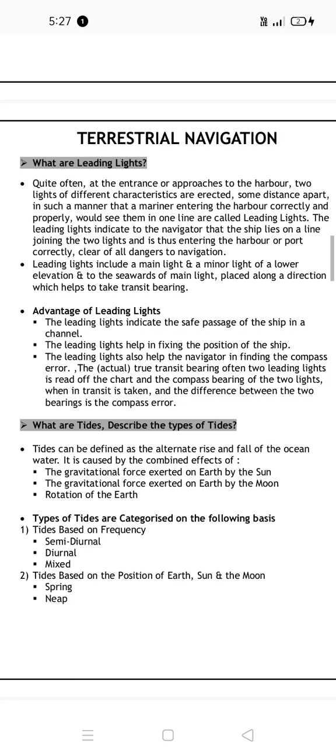The leading lights indicate to the navigator that the ship lies on a line joining the two lights, and can thus enter the harbor or port correctly, clear of dangers to navigation.

Leading lights include a main light and a minor light of lower elevation, placed to the seaward of the main light along a direction which helps take the transit bearing. These leading lights indicate a safe passage for the vessel in a channel.

The leading light helps in fixing the position of the ship. It also helps the navigator in finding the compass error. The true transit bearing of the leading lights is read off the chart, and the compass bearing of the two lights is taken when in transit; the difference between the two bearings is the compass error.

What are the types? Describe the types of tide. There are semi-diurnal, diurnal, mixed, and spring-neap.

What is semi-diurnal? It is the one with two nearly equal high tides and two low tides each day. That is the Bay of Bengal.

Diurnal means, in a 24-hour period, a single high tide and single low tide. This means the location has one high tide and one low tide - if there are two equal ones it's semi-diurnal, and if there is one it's diurnal.

What is spring tide? That is when the sun, moon and earth are in a line. Such tides are called spring tides. Spring tides are formed when the sun and the moon are in a line with the earth.

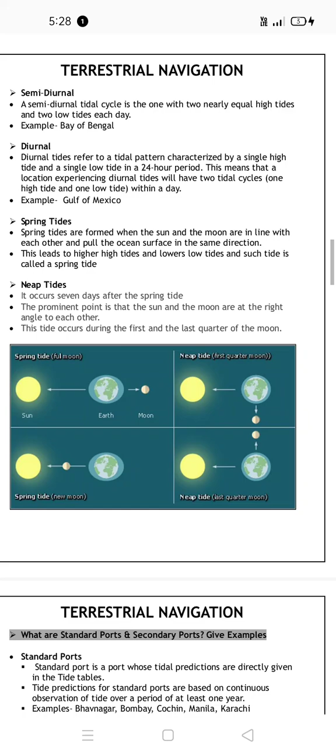Now what is a standard port? A standard port is one for which tidal predictions are directly given. Secondary ports are ports for which the tide rates have to be calculated with reference to the standard port.

Now what is defined as luminous range? Luminous range is the distance a light can be seen, depending on the current atmospheric conditions - it is the maximum range at which a vessel can see a light in any given meteorological visibility. Nominal range is the range at which visibility of 10 miles is possible; it is the range that appears on the chart and in the list of lights.

Geographical range is the maximum distance at which a light can be seen at a given time, determined by the elevation of the light and the height of the observer's eye. The formula for geographical range is 2.095 times the square root of the height of the light, plus 2.095 times the square root of the height of the observer.

Rising or dipping of a light: the distance to the sea horizon in nautical miles is 1.15 times the square root of the height in feet, or 2.0 times the square root of the height in meters.

The 2.095 value we have to remember. It is the distance beyond which a target of a given height will not be visible from the observer's position or height of eye, owing to the intervening curvature of the earth. Thus this range is dependent on height of eye and height of object only. The meteorological visibility, however, should be good enough for an object or a light to be visible at its geographical range.

Meteorological visibility and luminous range - again, it is the distance beyond which a target of a given height will not be visible from the observer's position or height of eye, owing to the intervening curvature of the earth. This range is dependent on height of eye and height of object only. The meteorological visibility should be good enough for an object or light to be visible within its geographical range.

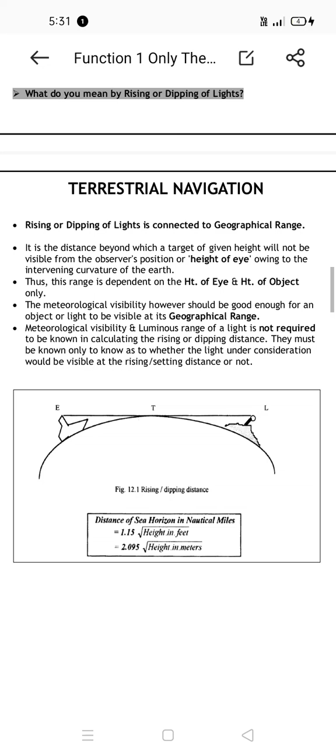What is a tropical TRS? A tropical revolving storm is a small area of low pressure around which winds of gale force, that is 34 knots and force 8 or more, blow spirally inward anti-clockwise in the northern hemisphere and clockwise in the southern hemisphere.

In case of a violent tropical revolving storm, wind speeds up to 130 knots have been experienced, with occasional gusts up to 150 knots.

Structure of TRS: a well developed TRS has three distinct parts: the eye of the vortex, the eye wall, and the outer storm area. The eye of the vortex is a calm central area with diameter between 4 miles and 30 miles, the average being about 10 miles. The eye wall is an inner ring of hurricane force winds having a width usually between 4 miles and 30 miles.

The winds in the eye wall blow in a perfectly circular path with speeds as high as 130 knots, with occasional gusts up to 150 knots. The pressure gradient in the eye wall is very steep, and therefore the barograph will register a near vertical trend downward before the eye and upward behind it, as shown in the accompanying figure.

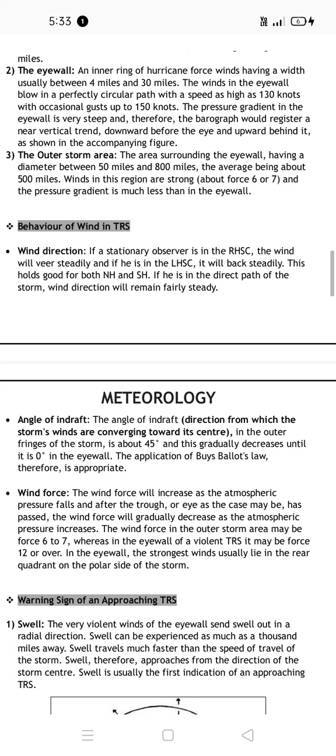Now, behavior of wind in TRS. Wind direction: if a stationary observer is in the right hand semicircle, the wind will veer steadily; if he is in the left hand semicircle, it will back steadily. This holds good for north and south. If he is in the direct path of the storm, the wind direction will remain fairly steady.

Angle of indraft: the wind force will increase as the atmospheric pressure falls, and the angle of indraft is 45 degrees, gradually decreasing until it becomes zero. How we will be facing it, that is more important.

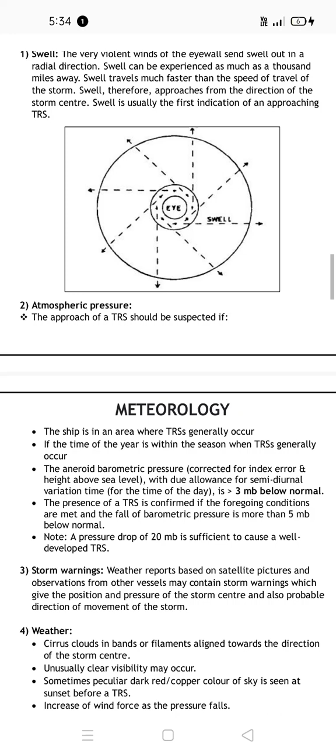Warning signs of wind - this is the most repeated question, so what is it all about? The very violent winds of the eye wall swell out in a radial direction. Swell can be experienced as much as 1,000 miles away, and the speed of travel of swell indicates approach from the direction of the storm center.

Atmospheric pressure: the approach of TRS should be suspected if the ship is in an area where TRS generally occur, if the time of year is within the season when TRS generally occur, and if there is a downward variation of pressure of 3 millibars below normal. If this change of 3 millibars below normal is present, TRS is confirmed when the foregoing conditions are met, and the fall may be more than 5 millibars below normal. Note: a pressure drop of 20 is sufficient to indicate a well developed TRS.

Storm warning: weather reports based on satellite pictures and observations from other vessels may contain storm warnings, which give the position and pressure of the storm center, and also probable directions of movement of the storm.

Cirrus clouds in bands or filaments aligned towards the direction of the storm center. Unusually clear visibility may occur. Sometimes a peculiar dark red copper color of the sky is seen at sunset before a TRS.

Cirrus clouds in bands or filaments aligned towards the direction of the storm center. Unusually clear visibility may occur. Sometimes a peculiar dark red copper color of the sky is seen at sunset before a TRS.

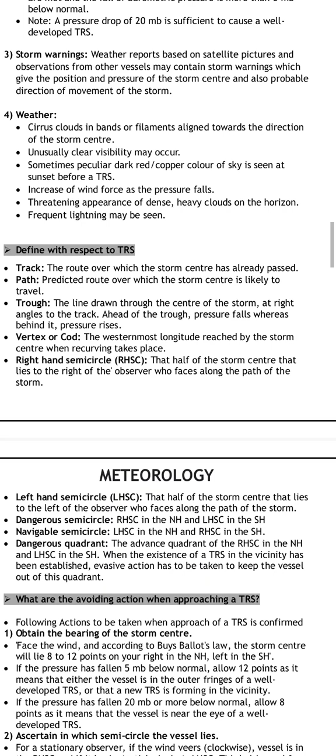Signs of an approaching storm include an increase of wind force as the pressure falls, a threatening appearance of dense heavy clouds on the horizon, and frequent lightning may be seen.

Track is defined as the route over which the storm center has already passed, or the path predicted. Trough is the line drawn through the center of the storm at right angle to the track.

The vertex or cod is the westernmost longitude reached by the storm center when recurving takes place.

The trough is the line drawn across the center of the storm at right angle to the track. The vertex or cod is the westernmost longitude reached by the storm center when recurving takes place.

Right hand semicircle is that half of the storm that lies to the right hand of an observer who faces along the path of the storm. Left hand semicircle is the half of the storm that lies to the left of the observer who faces along the path of the storm.

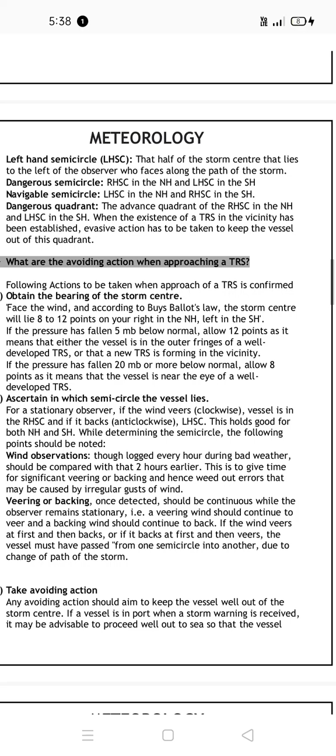Regarding the dangerous semicircle: the right hand semicircle is dangerous in the northern hemisphere, and the left hand semicircle is dangerous in the southern hemisphere, vice versa for the other side.

Now we come to avoiding action - what we as a sailor will be doing to save our ship.

To obtain the bearing of the storm center, face the wind, and according to Buys Ballot's law, the storm center will lie 8 to 12 points on your right in the northern hemisphere and on your left in the southern hemisphere. We will consider only the northern hemisphere.

Face the wind and apply Buys Ballot's law - the storm center will be 8 to 12 points on your right in the northern hemisphere. If the pressure has fallen 5 mb below normal, allow 12 points, as this means either the vessel is in the outer fringes of the wall of a well developed TRS, or that a new TRS is forming in the vicinity.

If the pressure has fallen well below normal, allow 8 points, as it means the vessel is near the eye wall of a developed TRS.

If the pressure is fallen less, allow 12 points, as it means the TRS is in the outer fringes. The storm center will lie 8 to 12 points on your right in the northern hemisphere - allow 12 points if the pressure has fallen less, and allow 8 points if it has fallen more. This helps ascertain which semicircle the vessel lies in.

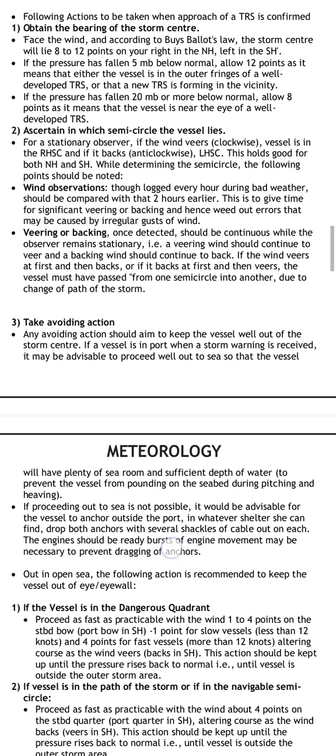Wind observation though logged every hour during bad weather should be compared with that of 2 hours earlier. This gives time for significant veering or backing to show, and helps weed out errors that may be caused by irregular gusts of wind.

Veering or backing, once detected, should be continuous while the observer remains stationary - that is, a veering wind should continue to veer and a backing wind should continue to back. If the wind veers at first and then backs, or backs at first and then veers, the vessel must have passed from one semicircle into another due to a change in the path of the storm.

Veering, once detected, should be continuous while the observer remains stationary - a veering wind should continue to veer and a backing wind should continue to back. If the wind veers first and then backs, or backs first and then veers, the vessel must have passed from one semicircle into another due to the change of path of the storm.

Taking avoiding action should aim to keep the vessel well out of the storm center. If the vessel is in port when a storm warning is received, it may be advisable to proceed well out to sea so the vessel has plenty of sea room and sufficient depth of water to prevent it from pounding on the seabed during pitching and heaving.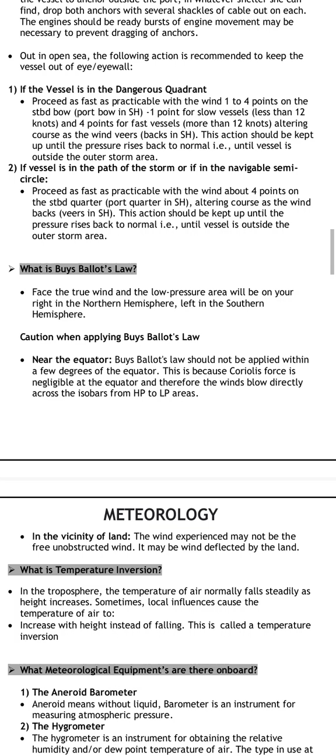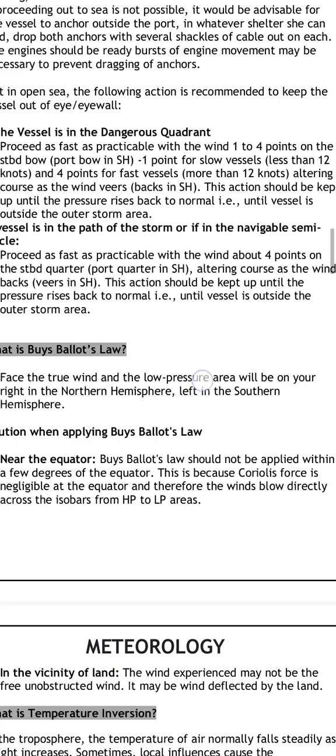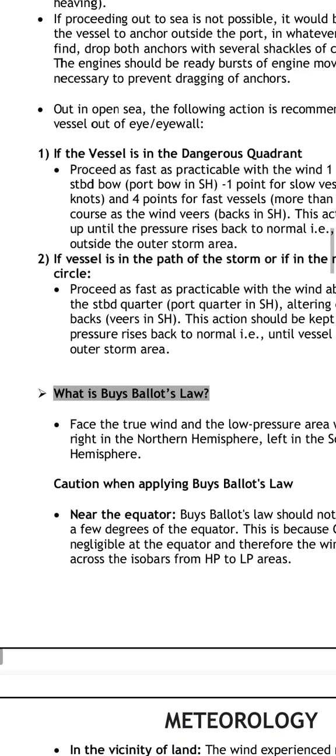By Buys Ballot's law: face the true wind, and the low pressure area will be on your right in the northern hemisphere, and on your left in the southern hemisphere. Caution should be applied near the equator.

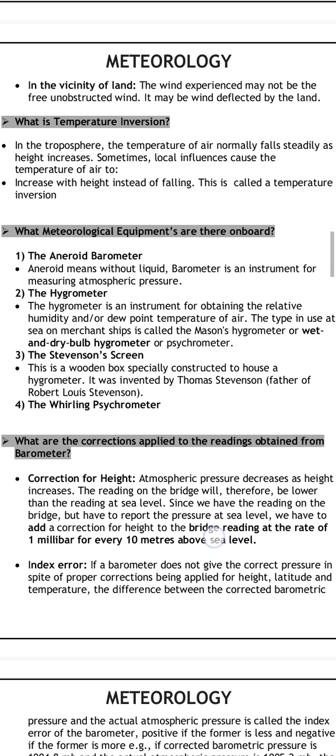What is a temperature inversion? In the troposphere, the temperature of air normally falls steadily as height increases. Sometimes local influences cause the temperature of air to increase with height instead of falling. This is called a temperature inversion.

What meteorological equipment is carried on board? The aneroid barometer, an instrument for measuring atmospheric pressure; the hygrometer, for obtaining the relative humidity and dew point temperature; the Stevenson's screen; and the whirling psychrometer.

What corrections are applied to the reading obtained from the barometer? Correction for height: we know that 1 millibar corresponds to approximately 10 meters.

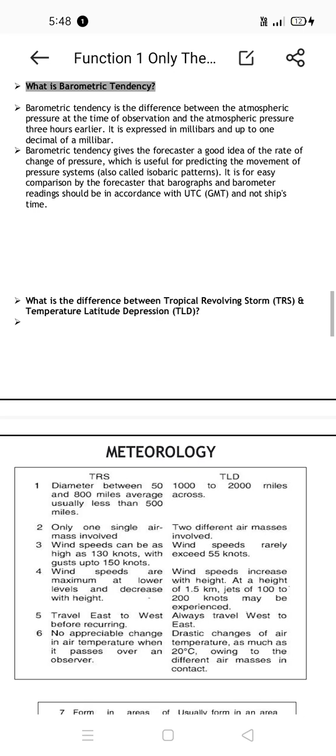Barometric tendency is the difference between the atmospheric pressure at the time of observation and the atmospheric pressure 3 hours earlier. It is expressed in millibars, up to 1 decimal of a millibar. This gives the forecaster a good idea of the rate of change of pressure, which is useful for predicting the movement of pressure systems.

For easy comparison of forecasts, the barograph and barometer readings are taken in accordance with UTC/GMT.

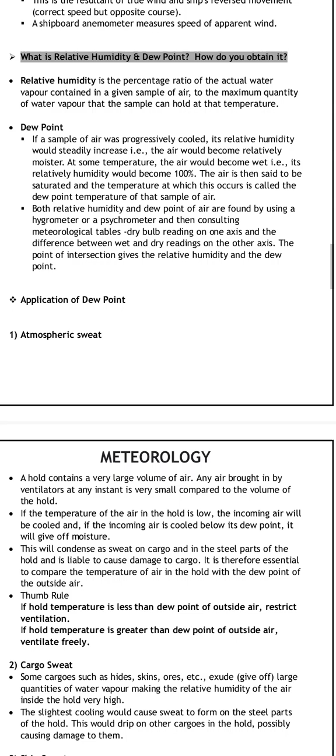What is relative humidity and dew point, and how do you obtain them? Relative humidity is the percentage ratio of the actual water vapor contained in a given sample of air to the maximum quantity of water vapor that the sample can hold at that temperature.

Dew point: if a sample of air was progressively cooled, its relative humidity will steadily increase, that is, the air will become relatively moister. At some temperature, the air will become wet, that is, its relative humidity will become 100%. The air is then said to be saturated, and the temperature at which this occurs is called the dew point temperature of that sample of air.

Both relative humidity and dew point of air are found using a hygrometer or psychrometer, and then consulting meteorological tables with dry bulb readings to get the relative humidity and dew point. Application of dew point includes atmospheric sweat, cargo sweat, and so on.

Fohn wind effect is the phenomena where the leeward side of a mountain is drier and warmer than the windward side. This will be more pronounced if the wind was blowing from the sea toward a coastal mountain.

What is a weather prognosis chart? These charts give the weather situation at the preceding synoptic hour over the entire area. They show the weather experienced at each land and ship station, pressure systems, isobars, wind direction, fronts, frontal depressions, etc., predicted for a specific future time. They may be made 12 hours, 1 day, or 3 days ahead so that the shipmaster can route his vessel. A copy of the prognosis chart is compiled by a professional meteorologist after studying the weather analysis chart and upper air analysis chart, taking into account various other factors as well.

Now, what is autopilot? Autopilot is basically used where the ship has to steer.

Now we are at the bridge equipment section.

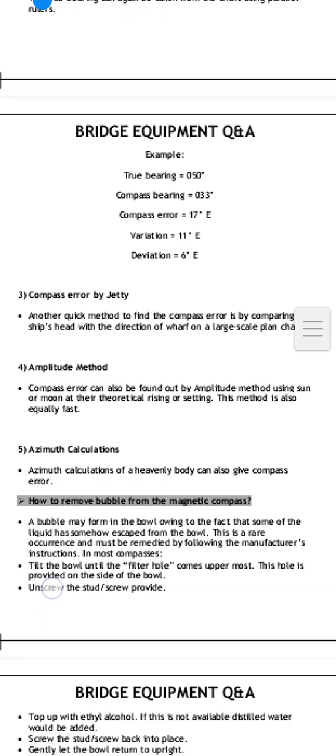Working of AIS. Ship's log, compass amplitude method, heeling error corrector, quadrantal corrector, Flinders bar parts. Phasing and ranging. Segment of GPS.

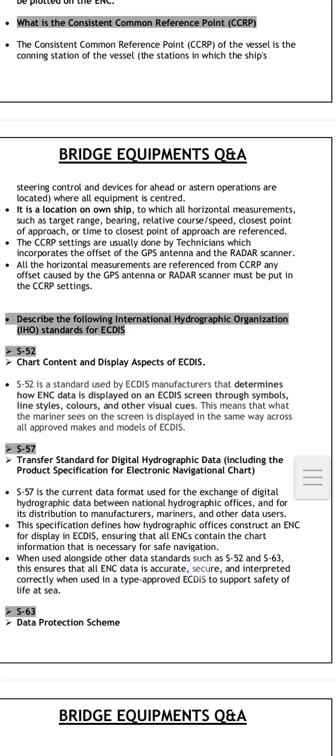Should I read it from different notes or the same? Thinking of reading from other notes. Let's see, we'll read it from here as well.

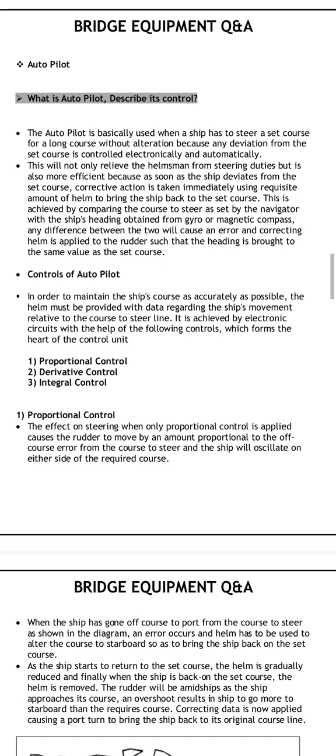So what is autopilot? Autopilot is basically used when a ship has to steer a set course for a long duration without alteration, and deviation from the set course is controlled electronically and automatically. This will not only relieve the helmsman from steering duties but is also more efficient, because as soon as the ship deviates from the set course, corrective action is taken immediately using the requisite amount of helm to bring the ship back to the set course.

This is achieved by comparing the set course to steer, as set by the navigator, with the ship's heading obtained from the gyro or magnetic compass. Any difference between the two will cause an error, and corrective helm is applied to the rudder such that the heading is brought to the same value as the set course.

Controls of the autopilot. In order to maintain a ship's course as accurately as possible, the helm must be provided with data regarding the ship's movement relative to the course to steer line. This is achieved by electronic circuits with the help of the following controls, which form the heart of the control unit.

Proportional control. The effect on steering when only proportional control is applied causes the rudder to move by an amount proportional to the off course error from the course to steer, and the ship will oscillate on either side of the required course. When the ship has gone off course to port from the course to steer as shown in the diagram, an error occurs and the helm has to be used to alter the course to starboard so as to bring the ship back onto the set course.

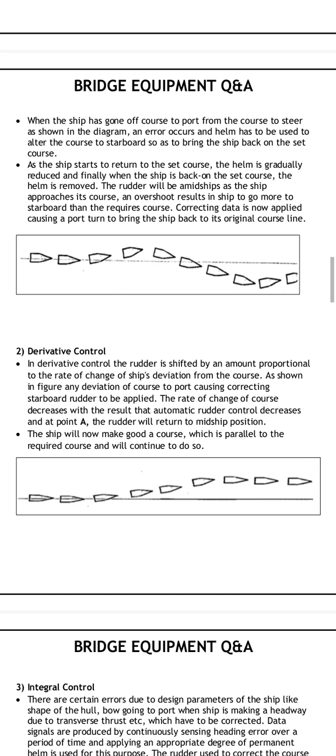As the ship starts to return to the set course, the helm is gradually reduced, and finally when the ship is back on the set course, the helm is removed. The rudder will be amidship as the ship approaches, but this causes an overshoot, resulting in the ship going more starboard than the required course. Corrective helm is now applied, causing a port turn to bring the ship back to its original course line.

This is the ship's deviation from the course to port, causing corrective starboard helm to be applied. The rate of change of course decreases, with the result that automatic rudder control decreases at point A. The rudder will return to the midship position. The ship will now make a good course which is parallel to the original course and will continue to do so.

Integral control. There are certain errors due to design parameters of ships, like the shape of the hull, bow going to port when the ship is making headway due to transverse thrust, etc., which will have to be corrected. Correcting signals are produced by continuously sensing the heading error over a period of time and applying an appropriate degree of permanent helm for this purpose. The rudder used to correct the course will now be about this permanent helm instead of the actual midship. Permanent helm now acts as midship.

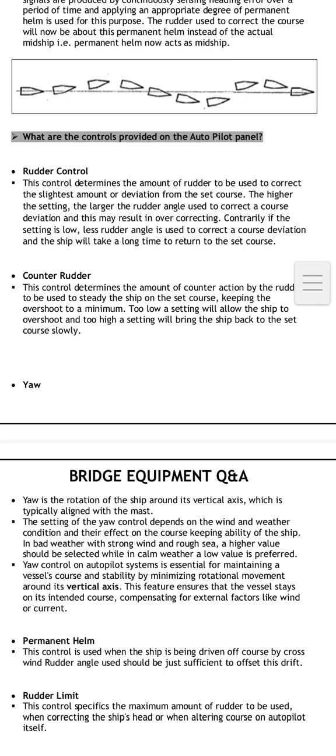What are the controls? Rudder control determines the amount of rudder to be used to correct the slightest amount of deviation from the set course. Counter rudder: this control determines the amount of counter action of the rudder to be used to steady the ship on the set course, keeping the overshoot to a minimum. Too low a setting will allow the ship to overshoot, and too high a setting will bring the ship back to the set course slowly.

What is yaw? Yaw is the rotation of the ship around its vertical axis, which is typically aligned with the mast. The setting of the yaw control depends on the wind and weather conditions and their effect on the course-keeping ability of the ship. In bad weather with wind and rough sea, a higher value should be selected, while in calm weather, a low value is preferred.

Yaw control on an autopilot is essential for maintaining a vessel's course and stability by...